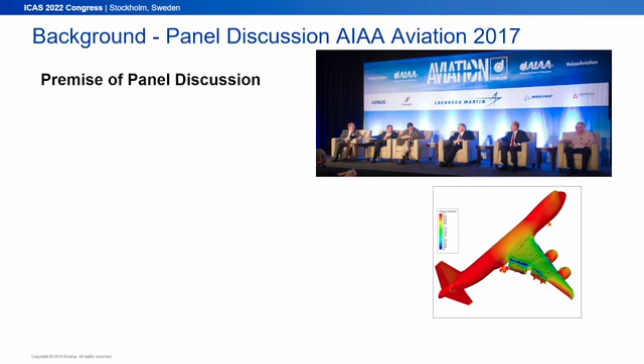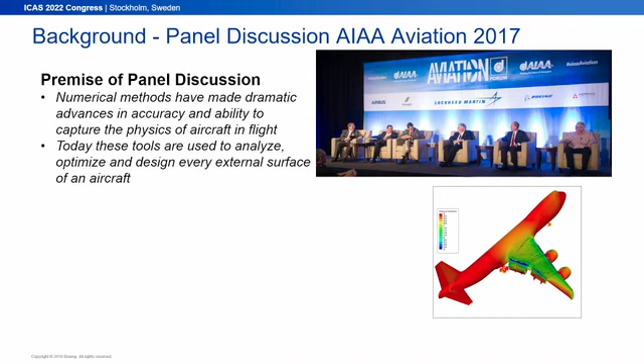Okay, it started back in 2017. There was a panel discussion in Denver at the AIAA aviation conference. The premise of the discussion, or the panel, was that numerical methods are improving. They've had dramatic advances. We design all of our external surfaces using these CFD tools. They will continue to evolve and improve.

And as you go through here, you'll see that really, if you look at the progression, you have to come to the conclusion that eventually we're going to be relying more and more on those computational tools to do the certification. So it was really a discussion about, okay, what do we need to do to prepare for that? And is it possible?

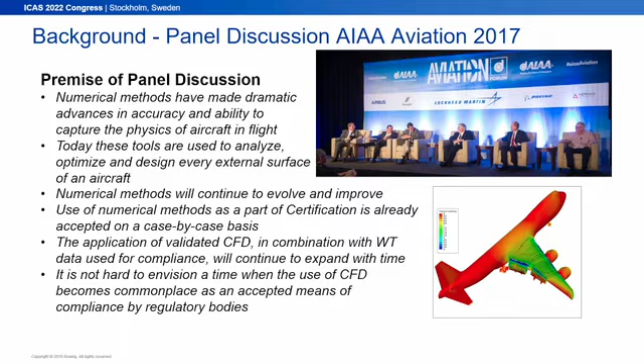So there was a really good discussion, and these are the outcomes of the panel. If we're to do this, we need to have a standard process. We need recommended practices so that there's a consistent way that we approach the problem, one that makes sure we're addressing the issues to be able to convince ourselves and the regulators that we have a good validation of our processes and that our predictions are trustworthy.

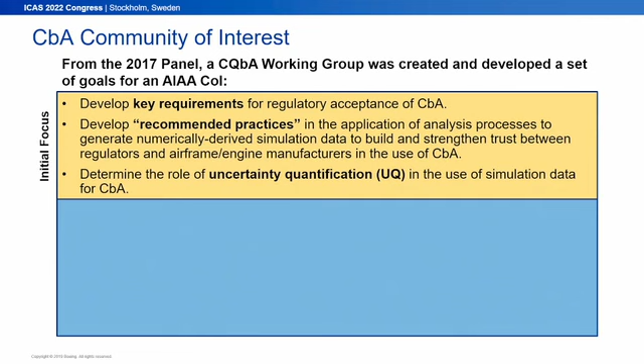But the other piece of it is that if we really want to do this correctly, we need to understand the uncertainty of our predictions. And so there was quite a bit of discussion about uncertainty quantification.

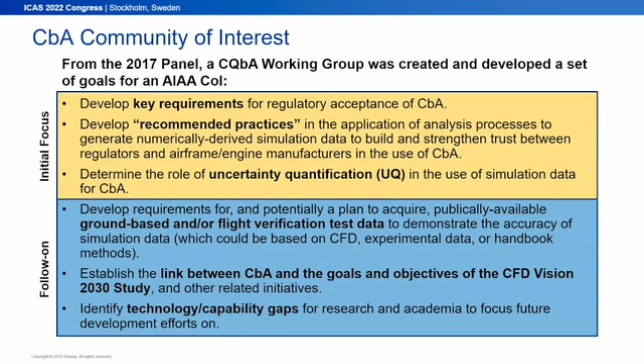The other aspect we came up with is that there's room for an industry group to look at some of the foundational validation cases. We should be gathering important, key data around certain ground test or ground-based testing configurations, and link that to understanding the physics associated with it. Do we have a way of validating our approaches when we talk about wind tunnel test results? And then where are the technology gaps between what we can predict and what we can't?

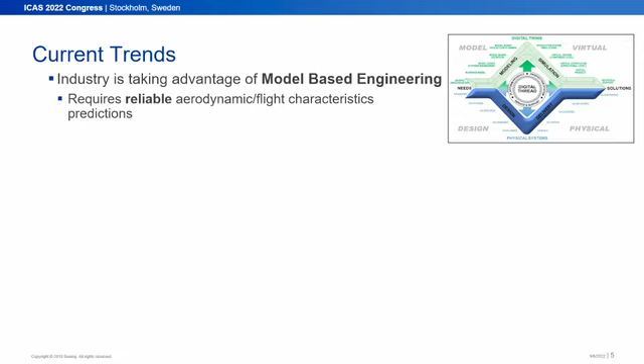There are some trends right now that I think are really converging on this topic. The first is model-based engineering, which you heard Lynn Hopper talk about yesterday. It's really a V&V activity - there's the physical world and the digital world, and how do you pull those elements together? If you want to do this right, you need a reliable set of tools to make predictions and know you're satisfying requirements. That's a desire, but it's also traceability of the process you follow, making sure all the pieces are connected - you know the geometry, the basis of that prediction, the details of the tool you used, and it's well-defined and well documented.

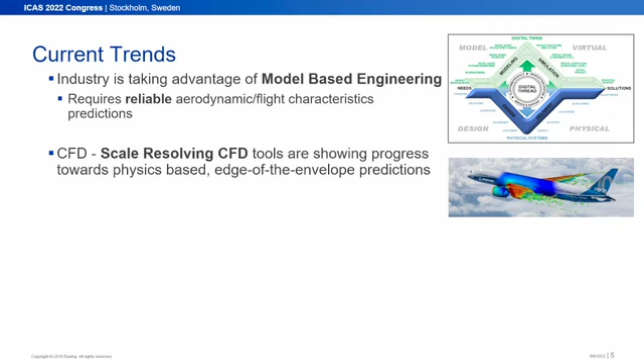Another aspect is that computational fluid dynamics is having interesting advances with scale-resolving computational methods, showing the ability to do a much better job predicting the physics. With complex configurations like high lift, you find there are limitations to the current set of Reynolds-averaged Navier-Stokes tools - they can't predict very well the smooth surface separation associated with a lot of high lift critical conditions. We're seeing a lot of advancements in that. The picture is actually a 787 with a wall-modeled LES solution put on top of it, representing that condition.

So there's a lot of really neat things going on with the computational tools. And the other part is that computer technology, what we sometimes call high performance computing, is also seeing continued improvement. While we thought Moore's Law was going to slow down, it's actually continuing - now with things like graphics processing units, and you have to utilize those advancements in computer capabilities. We're seeing pretty dramatic improvements in the ability to predict these more complicated flow solvers. So there's a lot going on that's helping us go in this direction.

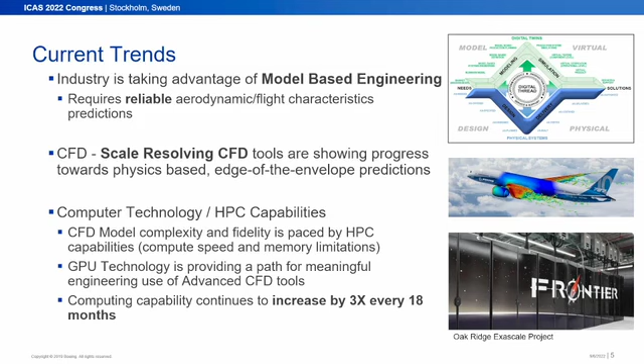When I talk about analysis, though, analysis isn't just CFD. It can be wind tunnel, previous flight test, or flight testing of the current configuration you're trying to certify, making corrections to the condition. It's really anything that is not specifically the flight test point called out in the regulations. Then anything that is a correction or an adjustment is partly from the analysis.

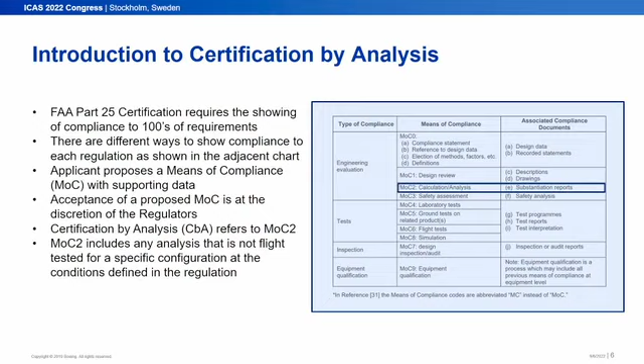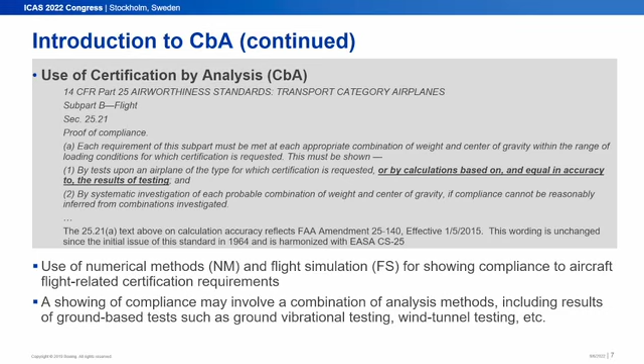The other aspect of it, and I kind of mentioned this before, is that this includes numerical methods. It includes flight simulators. So if you can show, when you have a pilot-in-the-loop simulation, that it's going to satisfy those requirements, that's another means by which you can use analysis in this case. And a showing of compliance can be a combination of any of those different analysis tools.

Another aspect of it is that it could include margins. You could say, I'm going to be conservative and I'm going to take away some capability just to be on the safe side. So it really becomes a very interesting discussion. I shouldn't say interesting. It really is a balance between what do we know, what can we prove, and then what's safe.

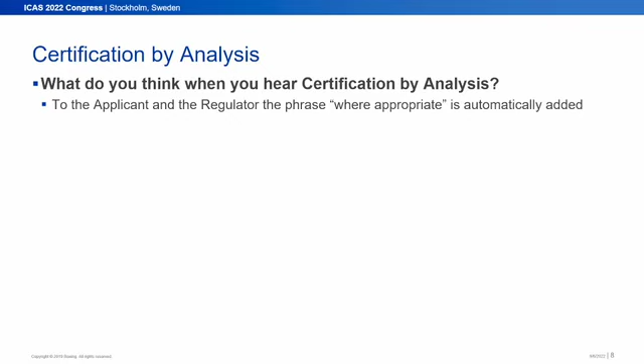So I threw in this chart kind of at the last minute, but I think when you talk about certification by analysis, you have to recognize that different people are going to react in different ways to it. And for those that actually are showing compliance, the very first thing they do is say, where appropriate. You're not going to do this in a case where you're not comfortable doing it. You can't prove that you can do it. You don't have any validation data. You're just not going to make that kind of commitment and try and convince the regulator that this is a valid approach to follow. So right away, you need to kind of put where appropriate.

And there's a lot of other things that go along with that question: okay, what flight characteristic are you trying to predict? What is the regulation? There are some regulations that do not allow you to do it by analysis. But where it does, how do you convince yourself that it's the appropriate thing to do? Are they corrections, as I said, to a current development program? Are they small changes on an existing certified product? Can you do a correction to a simple derivative? And how much of a difference are you willing to make the case that you have a validated approach?

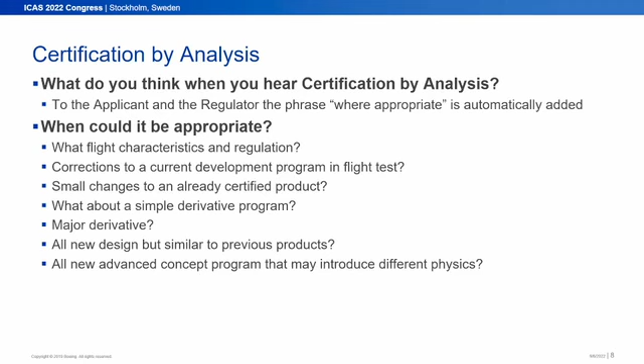So the goal is to accurately predict the flight characteristics and validate these characteristics in flight. We've used the term right at first flight, so you really have that accurate prediction going into it, and you just see it being a validation of those predictions, and right for the right reason. What I mean by that is that we have seen cases where tools, for compensating reasons, are giving you a right result, I'll use CLmax as an example, but for all the wrong reasons.

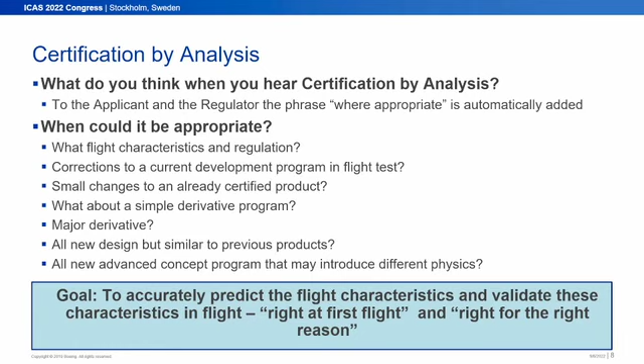We have examples where Reynolds-Averaged Navier-Stokes tools will give you a right CLmax, but it stalls outboard instead of inboard. And so it really has completely wrong characteristics associated with it when you really look carefully at it. So you want to make sure that you understand the physics behind it. You want to make sure that it's giving you the answer for the right reason.

Here's a couple of examples, and I'm sure that Airbus and other airframers do very similar things here: we have to certify different antennas. As you can imagine, the airlines are often asking for more and more capability, whether it's Wi-Fi, whether it's for entertainment, whatever it may be. And these are fairly well understood antennas or options for the airlines, and yet we have to go and put them on the airplane and certify them. And it may be we certified it on one version of the airplane and we have to certify it on a different family member.

But it is very common to go and actually do a calculation and show that there's no effect on any of the primary characteristics of the airplane. And that's been an accepted means of compliance. And so here's an example of using certification by analysis.

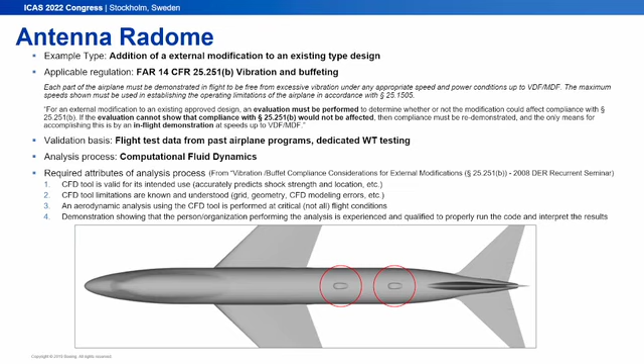Now, generally what it does is it says you just don't have to go to the dive speeds, but we're continuing to improve the methodology so that it's getting better and better, but you wouldn't expect these in most of the positions, at least on the airplane, to have much of an effect at all.

Another example here is minimum unstick. You probably have seen photos or movies of some of these types of tests where you do an early rotation of the airplane and it kind of sits on its tail. In our testing, there's usually a railroad tie associated with it. That can be quite exciting, but it's necessary to know what is the airplane capable of doing. It kind of lumbers along and then eventually takes off, and that's the VMU.

We typically do that at a number of thrust to weight ratios, and the higher the thrust to weight ratio is, the sportier that flight test condition gets, to the point where it's hard on the pilots to control, because at the high thrust to weight ratios, it's going to be a pretty sporty vehicle. It's going to react very quickly. And how do you make sure that the airplane doesn't hit hard?

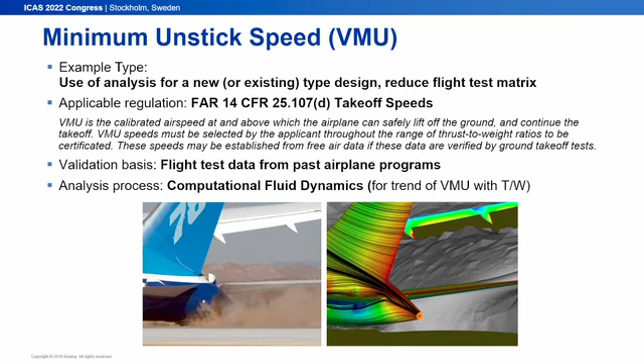So for safety reasons, we actually proposed eliminating some of those high thrust to weight ratios, take a conservative trend curve and marry it to actual flight test results for the minimum thrust to weight ratios. And that seemed to be a pretty effective way of going about that. And since it's a safety of flight issue, it actually is a really good example of why you might do this kind of stuff.

I talked about how you have to account for aeroelastics, you have to account for whatever the flight control systems might be doing to adjust for some of the loads, for instance. So it really begins to point to an area of that envelope that we don't do as good a job of predicting, and quite honestly, wind tunnels don't do a very great job of predicting. So those are the things we really need to start focusing on.

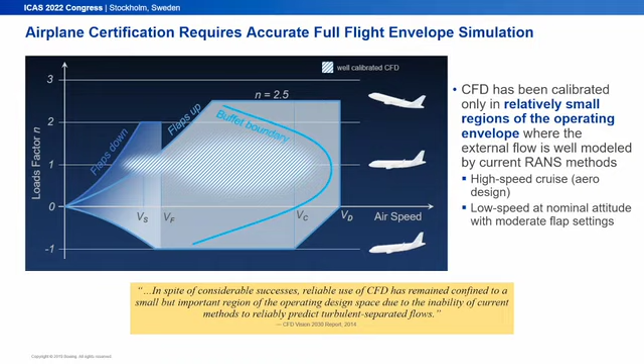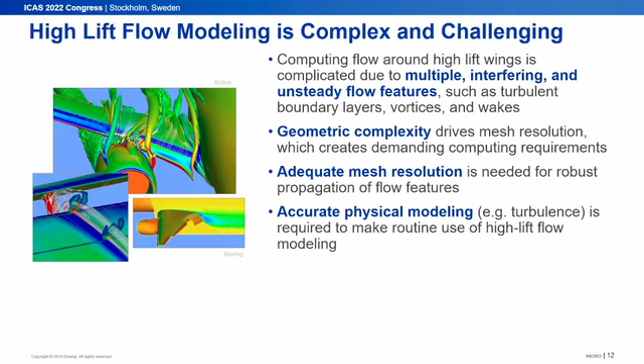It's geometrically complex, so how do you make sure you have adequate definition of the geometry? We've, over the years, continued to refine the geometry as we do more and more calculations; you really have to get the computational geometry as accurate as what you're flight testing. And you have to go through a number of things to make sure: are you adequately resolving the mesh? Are you getting convergence of the solutions? How accurately are you physically modeling the effects?

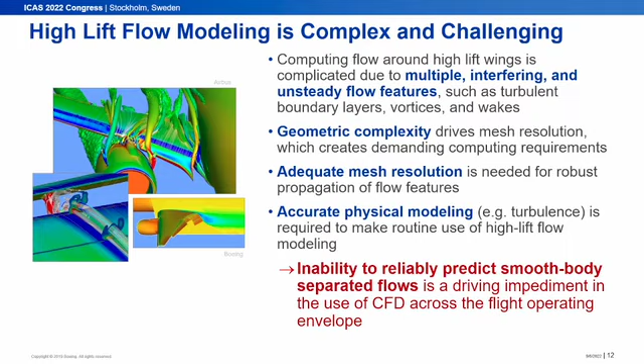There's one level above that, if you're looking at the pyramid, which is unsteady Reynolds-averaged Navier-Stokes. And then above that, which is just coming online, are wall-modeled LES and hybrid RANS-LES. And they're showing some very interesting progress. And then there's room above that if you really wanted to do a direct numerical simulation.

It's going to take a while on that Frontier machine that I was showing just to get a solution. And I think some people aren't even sure that you would be able to do it for a complex configuration like that shown below.

So as I said, the RANS is the workhorse. That's where we spend most of our effort. And for cruise configuration, where there's very minimal separation, which is what we're designing for, we do a really good job with Reynolds-averaged Navier-Stokes. But when we get to complex configurations that have a lot of interactions, it's not so good anymore.

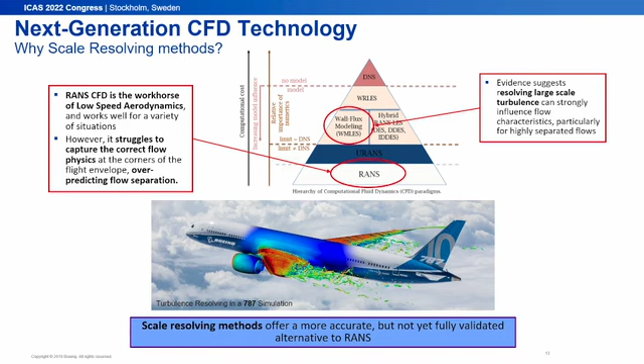So this kind of gets to, there's been a series of high lift workshops run by AIAA, and some of the information that you can get from that is, one, it shows that, yeah, we kind of peak with Reynolds-averaged Navier-Stokes. There are some things you can do to improve the accuracy, and that is what we call verification, where you have gone through to make sure that what you've programmed, the equations that you're solving, the turbulence model, is done correctly, and there's test cases that you can go and run on that.

And one of the things this high lift prediction workshop did is it says if you do that, actually the uncertainty around the final result can be reduced. And what you see on the chart in the middle on the right-hand side is that scatter from the unverified tools, but it actually tightens up quite a bit when you go to the verified, but it still shows that there's a shortcoming.

Recently, we're seeing from the high-lift prediction workshop that these scale resolving methods are actually getting the right answer for all the right reasons. I mentioned earlier that in one case, we have seen where you get the right CL max, but it separates outboard instead of inboard. Well, the scale resolving methods are showing it stall inboard and not outboard, and it's getting the right CL max.

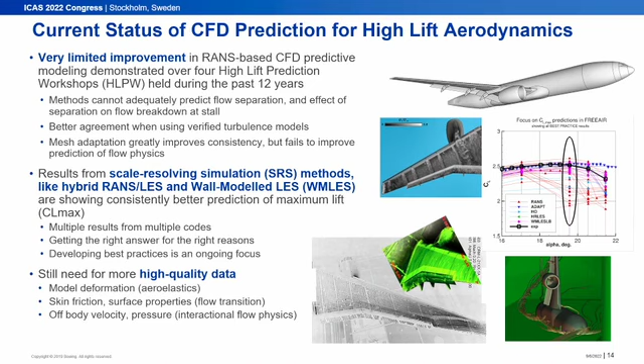It's now a matter of how do we make sure that we understand how to use that tool, and it's capturing all the physics that are necessary. And so there's still a need for high quality, kind of a database of a common open geometry. And I'll talk a little bit more about that later.

The other thing I wanted to highlight, and I don't know how many of you are actually familiar with all the CFD stuff that's going on, but there's certainly a CFD Vision 2030 that was published a while ago. This is sponsored by NASA with all the participants that are shown on the bottom. But one of the conclusions is there's a number of challenges that we're going to have to get through. And that really set a roadmap on the direction we should be going to advance the predictive capabilities.

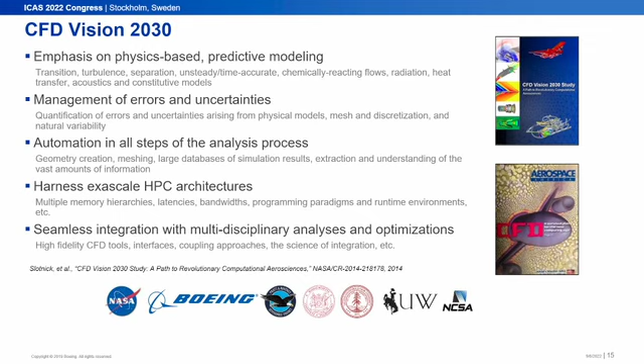One of the things that we found as we went through that community of interest with 120 some people is we all use the same terms with different meanings. And so one of the key findings from that is let's have a common language. That document really helps to begin to get that kind of common language. It also shows a lot of examples and supporting appendices on some of the different issues, uncertainty quantification, a quick explanation on the CFD side. So it's a lot of good information, and if you haven't seen it, I would suggest you go and get a copy.

And then there was also from NASA again, I'll call it a Vision 2040 on certification by analysis. And again, it shows the roadmap associated with trying to get to a very predictive capability that we're after.

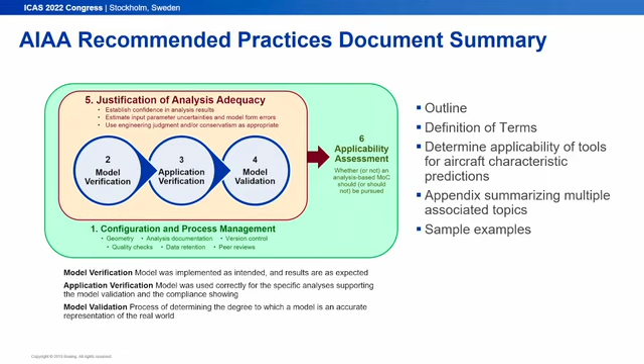And then, as I said, there's a number of other topics in that document that we put together. So it's, I think, a very helpful way of looking at the problem associated with using certification by analysis.

This is just an example. Obviously, it's an eye chart, you're not going to read all of it. But this is an example of the roadmap that was put together for the Vision 2040, the Cert by Analysis Vision 2040. It really does summarize that it's an integrated system.

And there's a lot of elements that need to go into this so that you have that confidence in the ability to predict it. You have all the insight you need to make sure that when you're looking at the physics, when you're looking at something maybe a little different from the last product, that you know you're going to capture the characteristics properly.

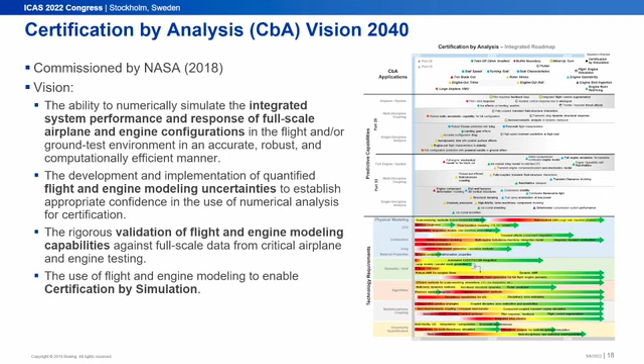And then, as I said, uncertainties are all part of that. So it's a really good document to read through if you have an interest. There's a lot of meat to that document.

And then there's what was called the technical challenges associated with predictive flight characteristics. So the first part is, how do you validate it, at least based upon wind tunnel testing, ground-based testing? That's kind of fairly straightforward. I think we kind of know how to do that. And in fact, we're actively doing this, and you'll see kind of that ecosystem that developed as a result of this thinking.

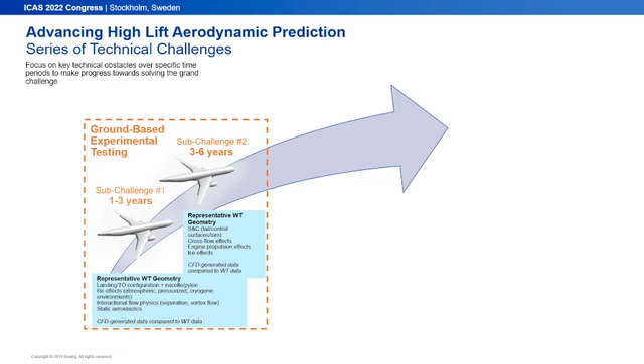But then there's a second point, which is when you start talking about multidisciplinary validation, what does that look like? When you're tying computational fluid dynamics to aeroelastics to an engine simulator, how do you prove it's all working correctly and validate it? It can be ground testing, maybe it's a scale flight demonstrator. There's different ways to do that, but we have to think through what's the best approach.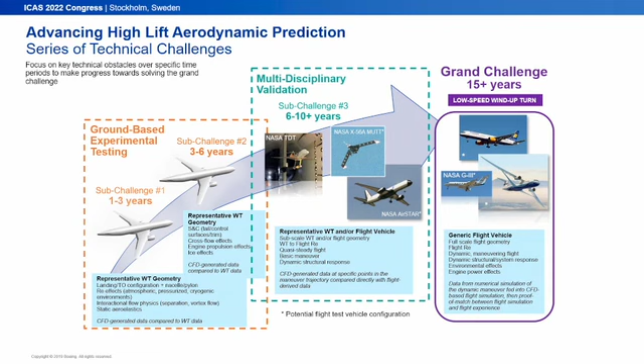And finally, the grand challenge is, how do you actually prove something in flight test? That you've predicted it, you go and do a wind-up turn, and sure enough, you've accurately predicted the characteristic you're seeing. So those are the elements around how you step through this, and we'll talk more about that a little bit later.

I mentioned the ecosystem. This is a common research model that we've been, it's actually been around since 2018. And it's being built by multiple organizations. I'll kind of show the entire image of all the different things being done.

But it's an open geometry. It is something you can find on a server at NASA. It's available to everyone. It has all the basic geometry. It's used by the high lift prediction workshop. And we're planning on doing a lot of additional wind tunnel testing, including getting information on off-body flow features.

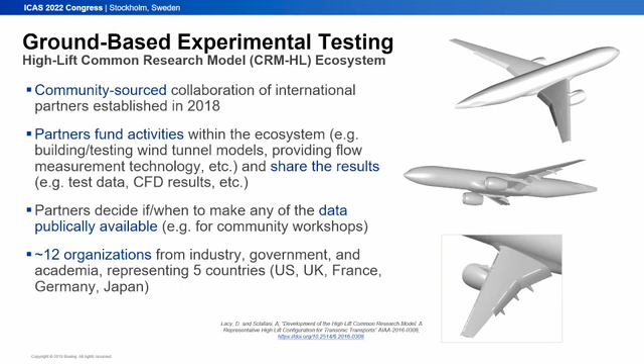And so there's a lot of organizations and teams working to build a number of models and get the kind of information we're looking for. As stated on the chart, there's 12 different organizations across the world, US, UK, France, Germany, and Japan that are working on elements of this.

Wind tunnel modeling effects will be part of this flow physics, CFD validation, so there's going to be a lot of instrumentation, much more than we would normally do for the type of production testing we typically do. Ice effects become an important element when talking about how to certify an airplane. Acoustics, trailing wakes, and even propulsion airframe integration are all elements of this ecosystem.

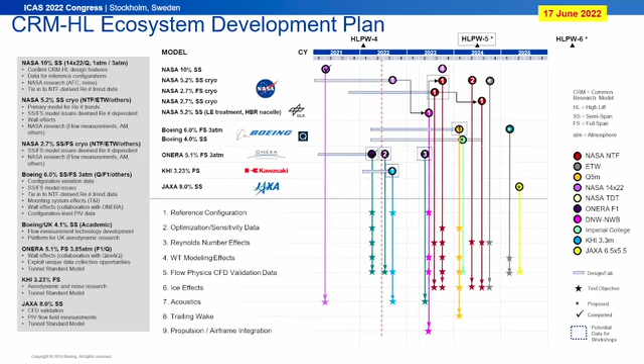For a number of years we've been pushing this big boulder uphill, and now it's beginning to have some momentum and falling on its own, so there's a lot of additional people coming on board. But it also requires a pretty massive effort to make sure we tie all of these different configurations that are tested, the wind tunnel models themselves, together so we understand what the differences are.

So, to summarize, and I'll obviously be leaving a little bit of time for questions.

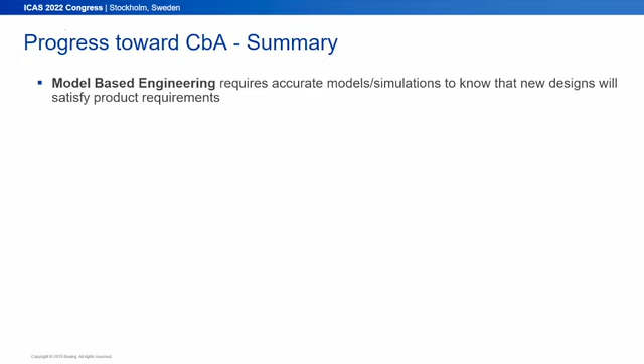Model-based engineering is really pushing us to get an accurate prediction capability, and there's an impetus to go this direction. It makes a lot of sense from our design capability that we improve the methodology to get as much performance, to make the products as safe as possible, and to even look at some of the failure modes through predictive capabilities that you'd never be able to flight test because it's a safety of flight issue.

Numeric methods continue to improve, and I've gone through the sub-bullets there, which is really kind of an exciting advancement that's happened more recently. Computational tools always kind of limit what we can do with our CFD tools, and they're coming along just as quickly as we need them to. So in this particular case, we're actually seeing the ability to get engineering solutions in a very timely amount of time, even though we're solving a much more complex set of equations.

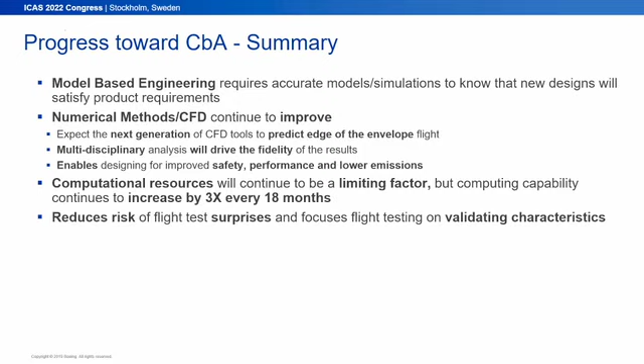Almost every program has an anomaly; we have discoveries in flight test. Part of the issue when we have those discoveries is how do you solve and resolve them. What we want to do is move the predictive capability forward so that we don't have those surprises, so those surprises are designed out of the airplane. Certainly now, that means we have the ability to fix those problems when we discover them.

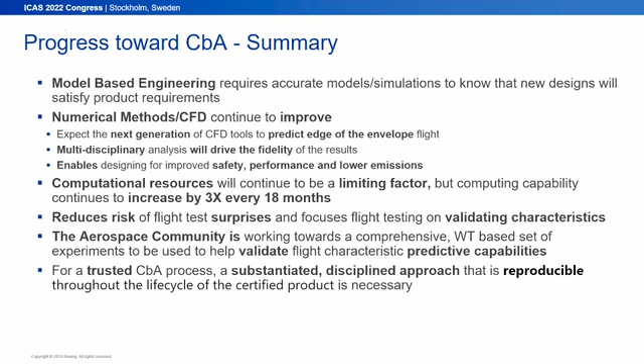As an aerospace community, we're working towards a comprehensive wind tunnel-based set of data to help validate predictive characteristics. But a high-quality wind tunnel set of data is not sufficient to show you can do certification. It's necessary, but not sufficient. What we're really after is a trusted certification by analysis process. It has to be substantiated, a disciplined and reproducible approach throughout the life cycle of the certified product. So it really is that higher level of confidence in those predictions that is necessary.

So I'll finish up with some challenges in front of us. I talked about continuing to do that high quality set of wind tunnel tests and collection of information so we can validate the scale resolving CFD tools. We continue to work towards characterizing component and system level uncertainties. That was one of the things that came out of the panel session - we need to understand uncertainty.

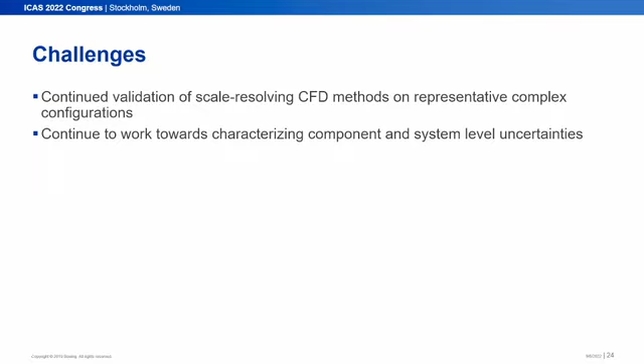So what does that process look like? You can go to a very detailed level, but is that practical and does that really help? We've got to think through what that really means and how we'd accomplish that uncertainty analysis. It has to be an integrated process. You can't do this bit by bit, it really needs to be tied together.

That points towards multidisciplinary tools, or MBE if you want to think of it that way. But it is absolutely necessary that it's not just one group. It's aerodynamics, it's structures, it's the loads that act on that, it's the control laws. So all that plays into this.

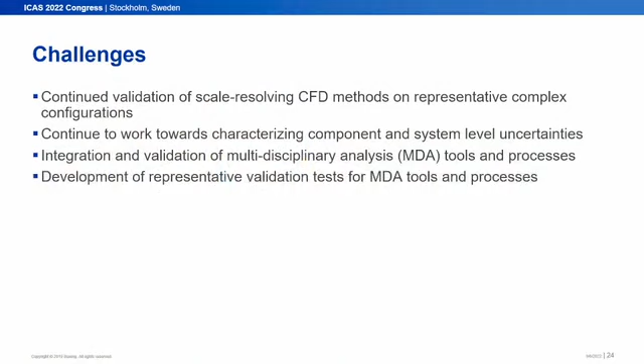How do you develop the validation tests for that multidisciplinary analysis set of tools and process? That's going to be interesting, we can kind of see how you can do that from the wind tunnel perspective on a rigid model. But wind tunnel models aren't completely rigid, they're more rigid than the real airplane. You have to account for the aeroelastics, but they are steady state, so it's a little bit easier job than what's being done on a real airplane.

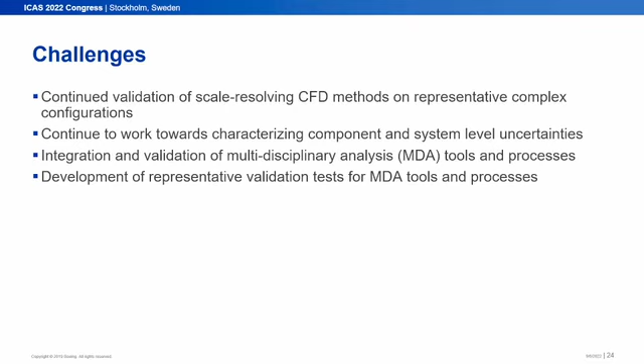So what are those representative validation tests for multidisciplinary analysis? And then finally, if you really want to do this, the acquisition of an appropriate set of flight test data that is available. There may be a question of whether that's really something the community should work on, or whether it's really left up to the airframe companies. I've got my opinion.

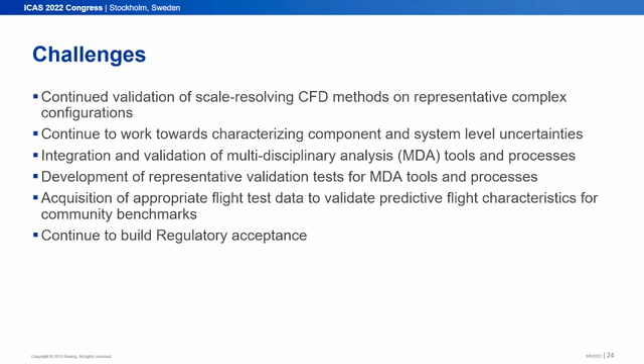And then how do you build that regulatory advocacy and acceptance? So those are the challenges in front of us.

There's a panel discussion at 10:30. The panel consists of many of the same people that were part of the Atlanta panel, so I'm looking forward to that session. We'll be talking about many of these challenges and other aspects of certification by analysis, so if you're interested, come back here and we'll talk about that.

At that point the flow is very chaotic, and we're talking about being able to predict that. So the airflow is unhappy, the plane is unhappy, and an airline pilot would be unhappy. If we've done our job correctly, he will never get into that condition because we understand the limits of the airplane. A flight test pilot, though, might be happy—once he recovers, he'll probably smile and say, let's do that again, and again, and again.